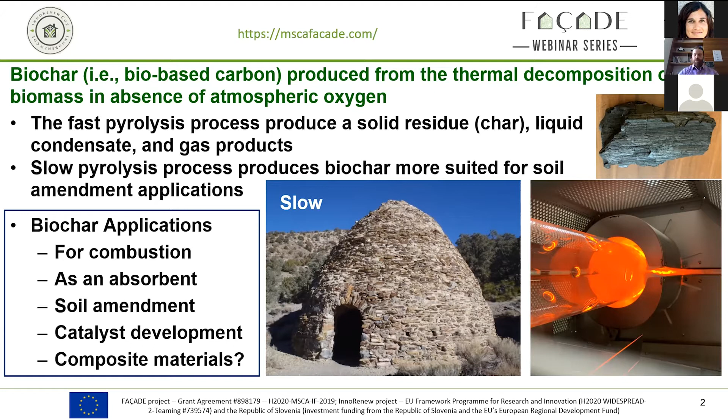So I've put together some potential end uses where we think there are opportunities for using this biochar material. We start on the left looking at biomass from different types of sources. Originally we focused on wood, but we're starting to move research into carbonizing other materials, in this case hemp, lignin, and olive stones. So you take this material, put it through a pre-processing step, and then a pyrolysis step. With that step, you can change temperatures, steps, how many steps you actually do, how fast you do it, the environment you're in.

So you can carbonize in a nitrogen environment or an argon environment. We've actually done carbonization under an oxygen environment. Remember before I said you typically want to do this in an oxygen-free atmosphere, but we've actually done it in an oxygen atmosphere up to a certain point. So you can modify these things. The main thing is when you're carbonizing it, you don't want it to catch on fire. That would be the worst case for making this carbon. And then at the end, you can do things to upgrade it. So we'll look at a few things where you do activation to improve its properties and what that actually does.

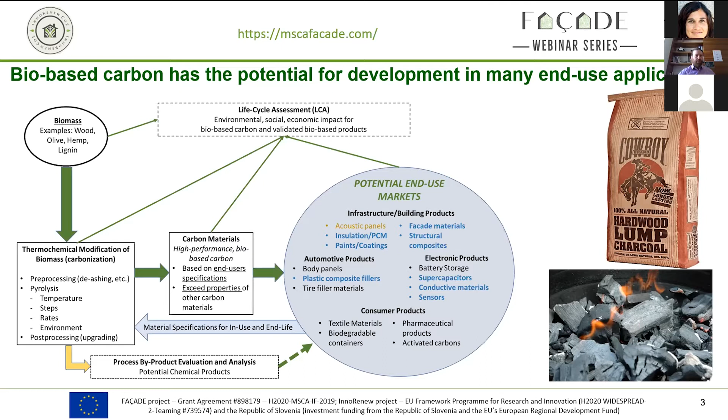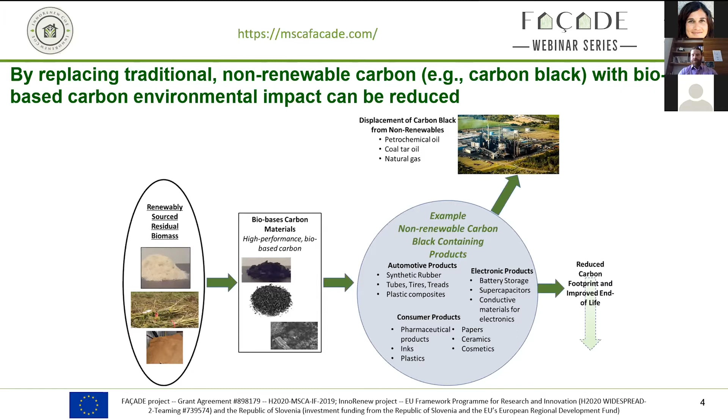So why are we looking at bio-based carbon? Really what we're trying to do through this research is reduce our dependence on these traditional type carbon materials. So here's an example of going from this renewably sourced material and then making the carbon, like I mentioned in the previous ones. And then here are the current applications where carbon black made from petrochemical oil, coal tar oil, and natural gas are used. So there's a lot of instances where these non-renewable carbon black materials are used for making products. So our goal is to try to use these renewable sources and get them to displace some of these other materials to reduce their carbon footprint.

So along with this, I mentioned there are some challenges. So a while back, we went through and did kind of a SWOT analysis, and I won't go through all this. You can come back later if you're really interested and read this. But one of the strengths, maybe the biggest strength for using these bio-based carbons is, if you develop them right and carbonize correctly, you can get a highly developed porous structure. And that porous structure will help you do a lot of different things. If you're looking to just make charcoal to burn, that porous structure doesn't really matter as much. If you're looking for this bio-based carbon for supercapacitors, then this porous structure becomes very important. So there are opportunities to do different types of processing to get different end products.

So along with the strengths, there's some opportunities. Obviously, if we can start replacing these fossil-based carbon materials, that's a benefit to the environment. There's a lot of work just in general in carbonizing, say, plastics or carbonizing textile waste and landfilling that, and holding that carbon for a long time in a landfill instead of just throwing it away or recycling it. So there are opportunities in using this bio-based carbon.

Some weaknesses are the technology, a little bit around cost, but I was on a call the other day where we went through some economics on looking at producing biochar, and it was actually very economical, especially when you get up to 20,000 or 30,000 metric tons per year. It becomes very economical. Probably the biggest issue is what I have listed here, this lack of large individual end users. So there's a lack of bulk sales for this. So as I mentioned, most markets now are set up for people buying these bags of this material. So there are a lot of weaknesses related to the current market conditions.

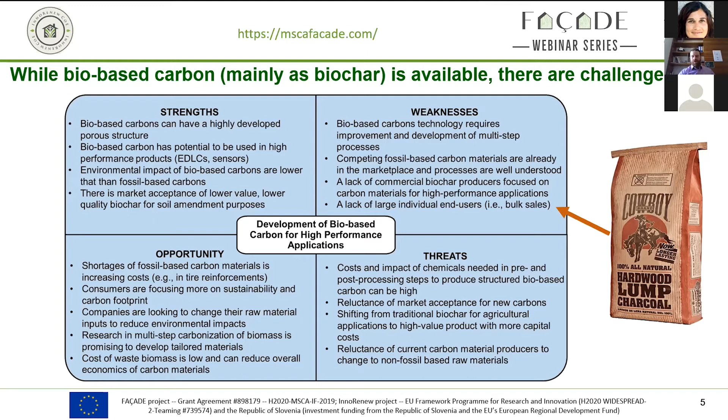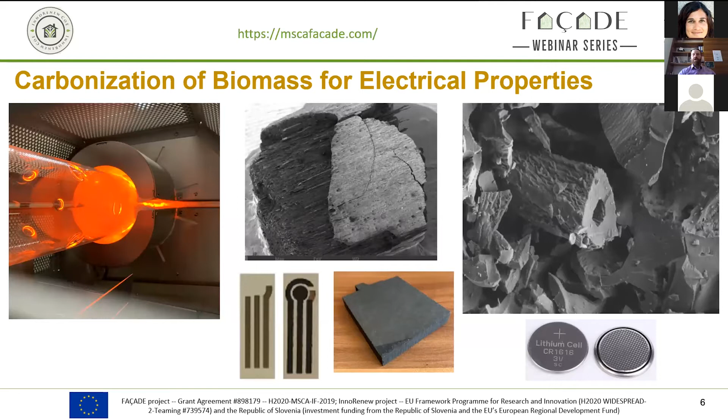So the first advanced materials I'm going to go through are using this carbonized biomass for electrical properties. And I'll go through some of these fairly quick, and then we can come back to questions at the end if you have some questions. But here's the first kind of real big study that I was involved with that was looking at carbonizing Appalachian hardwoods or low value hardwoods, and also short rotation woody crops. We were taking red oak, yellow poplar, and shrub willow. The shrub willow was grown on marginal farmland and reclaimed mine land, and carbonizing at these different temperatures. And we were doing that for multiple applications, which I'll show in the next slides.

In this particular research, we were doing this in a tube furnace at a rate of 50 degrees Celsius per minute, and then, for all the results I will show you, holding this material in there for 30 minutes of duration.

So the first thing, once you start carbonizing these materials, you want to look at are how much fixed carbon's in there, how much ash do you produce, and then later on when we start talking about some of these properties, the oxygen content and nitrogen content actually become fairly important, and how well they perform in their intended applications.

From these three species, you can see that the red oak generally had the highest carbon content when you got up to 900 and 1,000, but the yellow poplar actually at 1,000 was the highest, but it was different at 900. So overall, the red oak seemed to do a little bit better in terms of carbon.

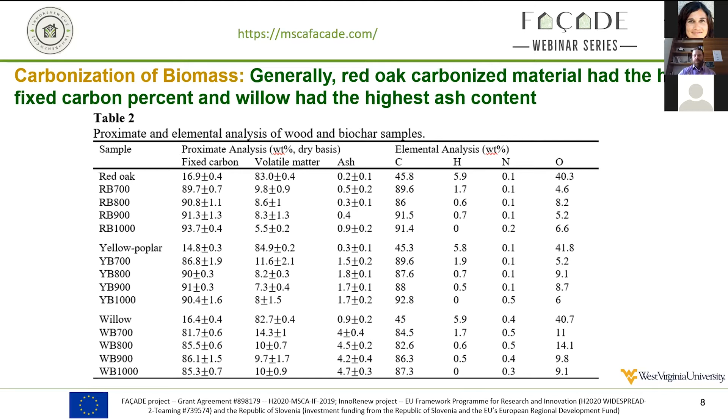Okay, so that brings us into how do these biomasses perform when we're using them for conductivity. So here's a simple setup to measure conductivity, and you can see the different types of biochar or carbonized material and how it worked. What happens is you put a certain amount of this material in this die and you apply pressure. As you apply more pressure, obviously you're forcing these particles closer and closer, and you start getting better conductivity. So typically you would plot this conductivity measurement versus density.

Mainly the key takeaway here is, if you're looking at these yellow poplar, willow, and red oak, biochars made at 700 degrees Celsius in the bottom, you don't really get much conductivity. So it's not until you start getting to 800, 900, 1,000 degrees Celsius that you actually start seeing anything really good in terms of conductivity. So if you're producing biochar at 500 degrees Celsius, thinking you're going to be able to use that for conductive purposes, you won't be able to.

But if your intention is to be using this for soil amendments, we're wasting energy by going up to this 700 degrees. So it goes back to, what are you trying to use this material for? And then that really changes how you're going to do the carbonization.

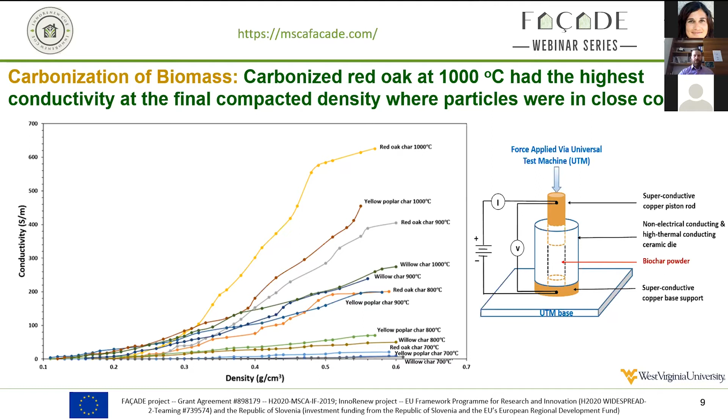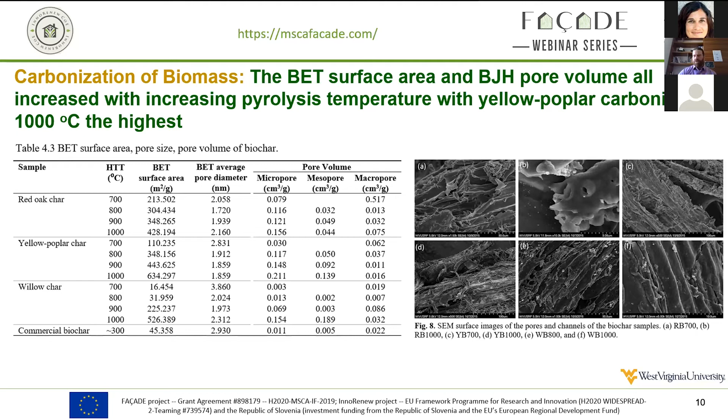Especially at these higher temperatures, you're taking out more of the lignin structure and turning that into carbon because everything else is pretty much gone. And you're starting to get higher surface areas and you're producing more porous structure. So this research was done without any kind of post-processing activation or activation within the process. This activation will actually help you get better surface area. But we were really interested in this first part and seeing just how much surface area there was.

So a few examples of using these materials. This one is mixing it with polyvinyl alcohol in different levels and using it as a sensor. In this case, it was a pressure sensor. Here are some results on how that works as a pressure sensor by adding different percentages, anywhere from 6% up to 20% weight, if you're looking at a long range of pressure, so 0 to 350 kilopascals of applying pressure to this sensor.

Adding 6% by weight is the best. It's more linear and it covers the entire range. And if you look at any of these graphs on the right, you can see once you get to a certain pressure, they just flatten out. So that means that sensor wouldn't be able to tell the difference between 200 kilopascals and 300 kilopascals of pressure on that sensor.

So if you're using these sensors in, say, a robot hand doing some kind of automated repairs to a satellite, for instance, which is some work that we've looked at in the past, you might be putting too much pressure on a part and actually crushing it. So it's important to get the right type of carbon in there and the right weight percentage. And then the one on the left is just showing that you get to a certain point, in this case 16%, where you don't gain any more conductivity in this type of composite. It actually gets a little bit worse.

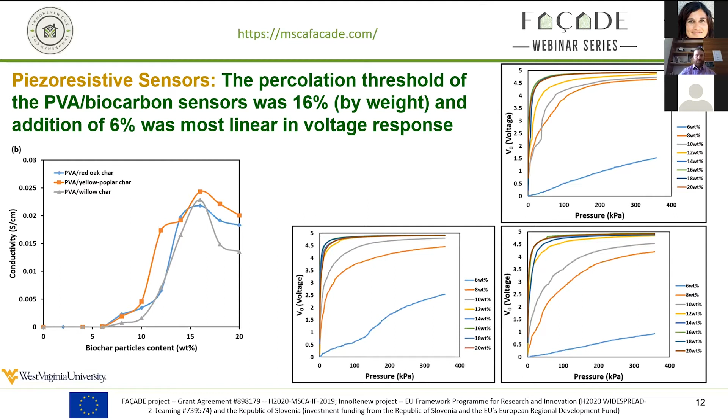So moving a little bit away from this conductivity part, but still in the electronics field, I mentioned this ordered structure that you can get from carbonizing in a certain way. So this research was looking at forming highly ordered mesoporous carbon. Yesterday I took a screenshot of how much this carbon material goes for.

So if you want to buy a 70-gram bag of activated carbon, it is $217 US. So a fairly good price per gram compared to that cowboy charcoal that you would use for heating, which wouldn't be anywhere near as expensive as this activated carbon. One of the keys to look at as we go to the next couple slides is this material's capacitance. So it's 28 farads per gram. So you'll start seeing how that compares to some of the work we're doing.

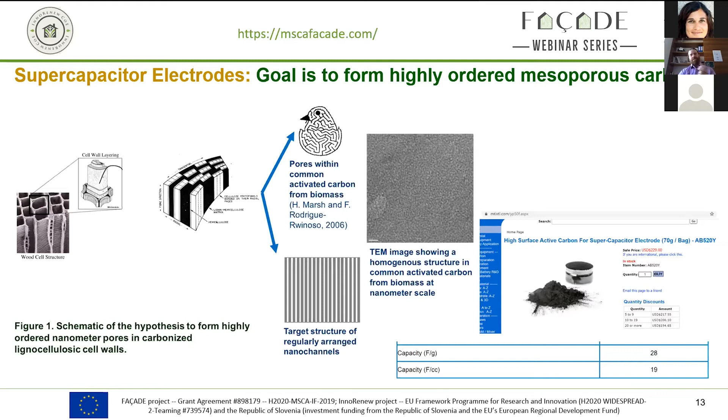The idea is that you remove the hemicellulose first through carbonization, and then you want to remove the cellulose in a certain manner so that you don't degrade the original biomass cellular structure. So you want to keep these really nice ordered channels, and you don't want to just blow it completely apart. I'll show you two examples with the same species, one where it's just kind of messy, and the other where you get nice ordered material.

So this is the same biocarbon which I showed before. Before, the yellow-poplar performed the best in conductivity. But in terms of capacitance, the willow, which had the highest ash content and the lowest carbon content, actually did the best. So here we're at 44 farads per gram, and those ones for sale were around 28, if I remember right. This research was done by including these carbon materials as electrodes in coin cell batteries, and these capacitance tests are done. So no activation done here.

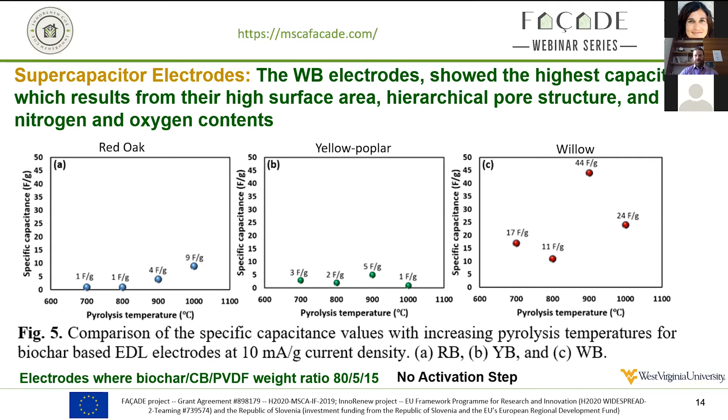Following on this research was another project looking at a more stepwise carbonization using the same willow material, to see if you can improve the capacitance. The results in table 2, and the graphs next to it, are this willow that went through a pyrolysis route of different steps. It was carbonized to 450 to 550, then stopped, and later activated with CO2 up to 800 degrees Celsius and held there for 60 minutes. So this can tell you what activation will actually do in terms of improving your capacitance properties.

So if we look in table 2, you're seeing these surface areas go up quite a bit compared to before. The one below where it says willow char was from the previous result. At 800 degrees C in that original research, we were at 31 or 32 square meters per gram. Under this activation route, if you pick one of the 800s, the BAC 800-30-D, surface area is at 618. So quite a huge increase in surface area. And that ordered structure also translates over to higher capacitance, up around the 100 range compared to the 40 we were getting before.

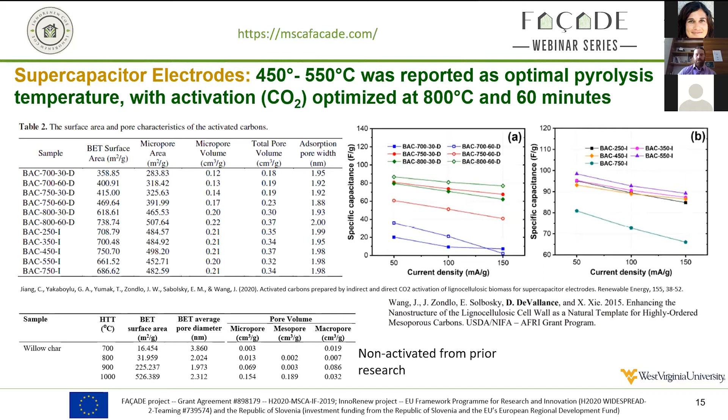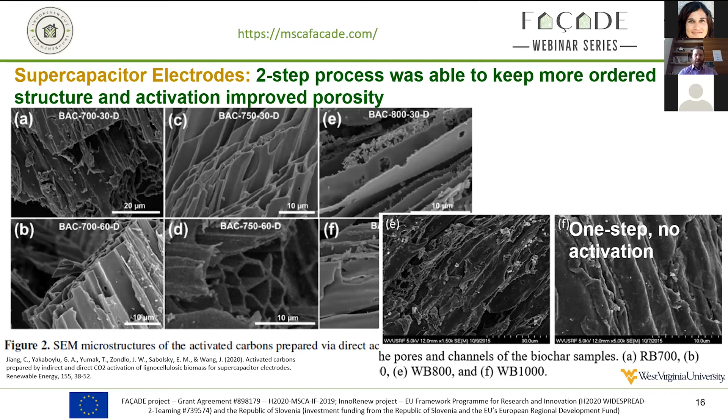So here's just some images of the differences. The one on the left side is when you're doing this stepwise carbonization to keep that ordered structure. You can see the channels, the original cell wall of this willow is still pretty well intact, and you can see the pores developed in there. The other side is without really any steps, just going straight up to 800 degrees. This is also the same willow, and you can see it's not a really good ordered structure. Things are kind of torn apart, so you don't take advantage of the nice order you had. Okay, so that's a little bit on these electronic type applications.

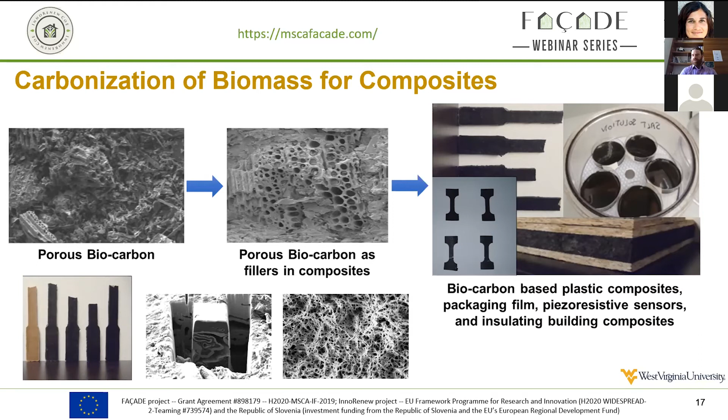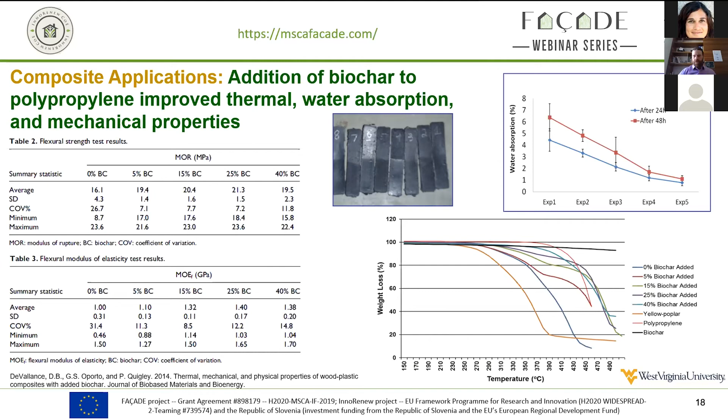Then another kind of composite that we're looking at is using this for improving water quality. So here was a research project we had using torrefied and carbonized biomass and mixing it in with wood chips to absorb rainwater that was running off or running onto a livestock feeding, really loafing area. They weren't really feeding on it, they feed off to the side of it. But in this case, these livestock are out there doing what livestock do and making kind of a mess, and then it rains, and then that water and manure typically just runs into a river.

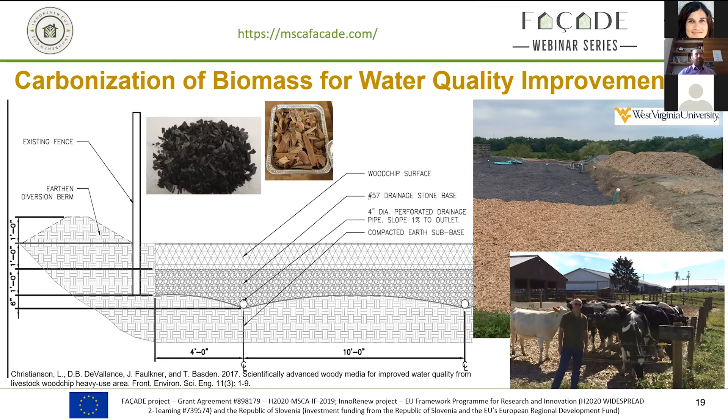So we're looking at using this biochar as a way to improve water quality in this engineered type system. So it's about, let's see, a little less than maybe 3/4 of a meter deep type column, or bed, that we were looking at. So really to study this first, we were doing some in-lab studies with tubes. We're packing the tubes with all the different kinds of composite mixtures that we wanted.

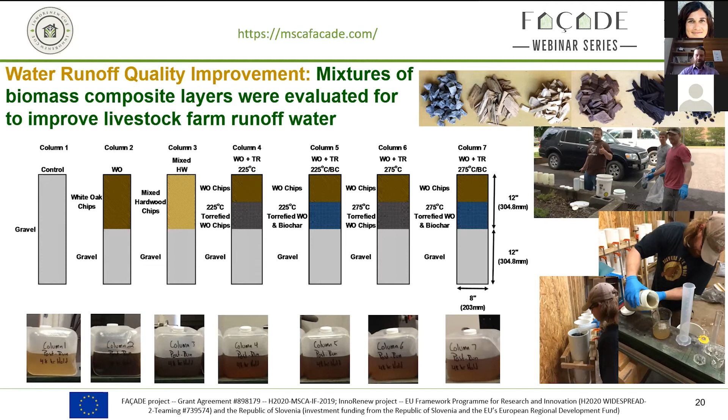And you can see as you go to column 5 and column 7, we have the biochar or BC included in there, and it's mixed in with other wood chips, torrefied wood chips, and also just regular wood chips. And then you can see what this cow wastewater looks like when it comes out of these different tubes. The main thing is we wanted to see what this biochar did. So the mixtures that included biochar were able to actually reduce the pollutants in the water, which we're showing in these graphs, specifically total nitrogen, ammonia, and phosphorus that was running off of this potential pasture field.

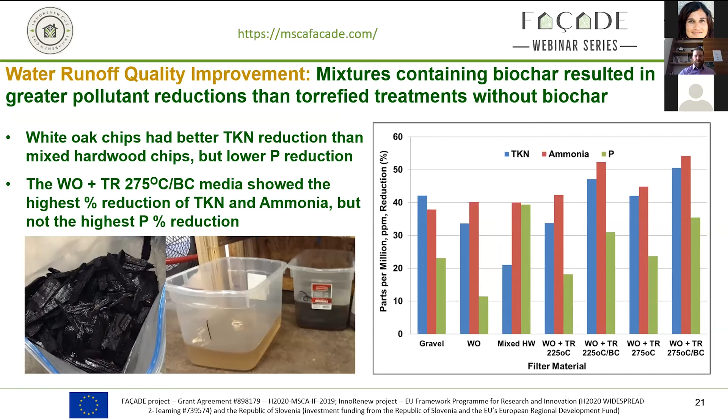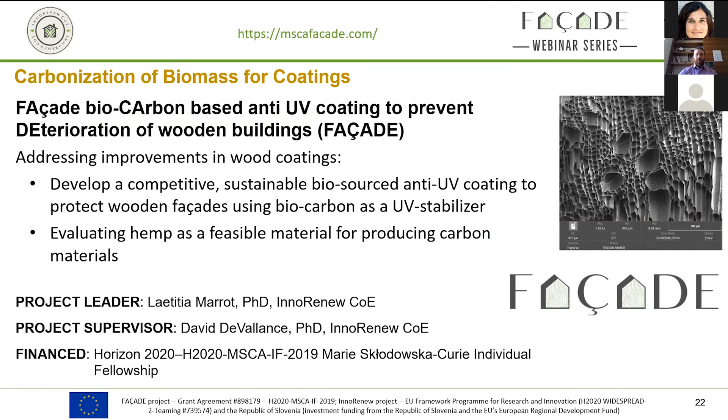So last couple slides, this last one is kind of where we are now. So you're attending this FAÇADE webinar, and this is really what the FAÇADE project looks like. Using these carbonized hemp materials as an improvement or an additive for coatings in facades to improve the UV protection. So Laetitia will be explaining this in much more detail later, but really what we're trying to do now is look at other carbonization routes, such as hemp, olive stones, Arundo donax, and other underutilized wood species to make these carbons.

I like this image on the left of the hemp that Laetitia was working on. This didn't have any activation. This was a one-step, it wasn't multi-step, and you can still see this ordered structure taking place, unlike the willow that was kind of destroyed. And you can see the porous nature in this image of all the pores that are created in here. So if you activate this even further, I think you have even more opportunities there.